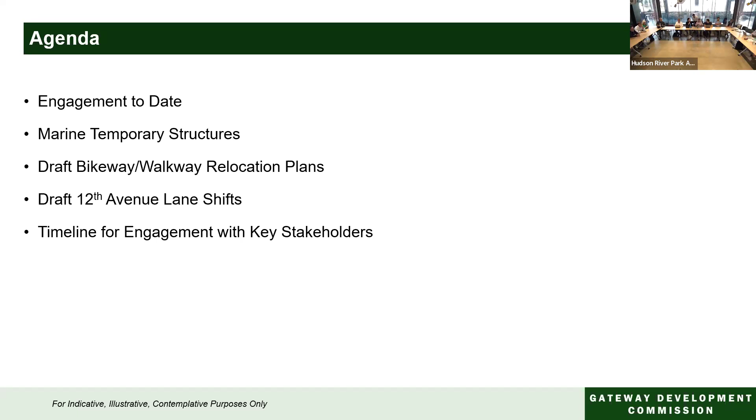So here's our agenda. I'm going to do an overview of engagement to date. We're going to talk about the marine temporary structures that are planned for in the park, the bikeway and walkway relocation plans, the draft 12th Avenue lane shifts, and then the timeline for engagement with key stakeholders.

Engagement to date. So we just want to provide a snapshot of some of the meetings that have taken place since last June of 2024, specific to waterside and landside work in Hudson River Park. In June of 2024, we presented to the Waterfront, Parks, and Environment Committee as part of the 4F process that is federally mandated. And then CB4 submitted a comment letter as part of that process. Then we came back because there were additional changes in April of this year. CB4 submitted their letter in May of '25.

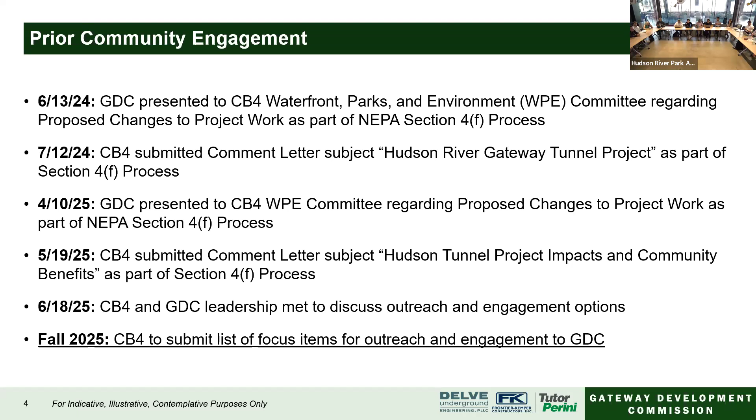And then in June, we met with CB4 leadership to discuss outreach and engagement options, also community benefits. And what we're expecting from CB4 is to submit a list of things they want us to run down and what are some possible community benefits that we can provide as part of this project. Next slide.

This provides a nice snapshot of a lot of the work that we're doing, and we do talk about New Jersey here a little bit, so I hope that's okay with everybody. But just moving west to east, we are about to wrap up what is called the Tonnelle Avenue Bridge Utility project by the end of this year. Then moving down a little bit, you have the Palisades Tunnel contract, which will be boring through the Palisades rock, going from North Bergen to Weehawken. That will eventually connect into the river and then into the Manhattan Tunnel. Move down a little bit further, you have the Hudson County Shaft that's being built in Weehawken.

And I'm sure most of you have seen this in the water, the Hudson River Ground Stabilization Project. You have a cofferdam that is out there right now. That project is to strengthen the soil in the Hudson River. If you've attended past meetings of ours before, we have described it, we call it chocolate pudding. We need to strengthen the soil there because that's the consistency of what's in the river. And then coming through, what we're most focused on here tonight is the Manhattan Tunnel project, which was awarded earlier this year. It's a little bit less than, I think, a $1.7 billion contract. In total, we have 5 contracts that are active right now.

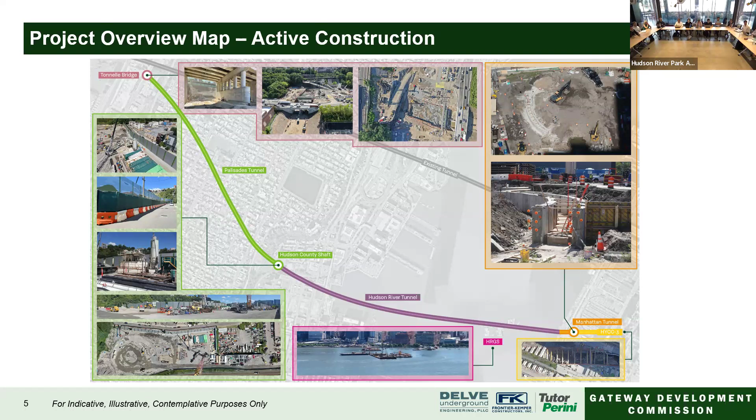I don't want to forget about Hudson Yards concrete casing. Apologies. That is happening. If you're looking at the High Line from West 30th Street going down, you can look right into the concrete casing that they're building right now. And that is expected to be done in November of '26. And then we get to the Manhattan Tunnel project. This is a snapshot of the footprint of our work specific to Manhattan. You can see the Hudson River ground stabilization there, the white box. Moving further, there's our footprint in the park by the heliport across 12th Avenue into block 675. And then we're connecting finally into Penn Station.

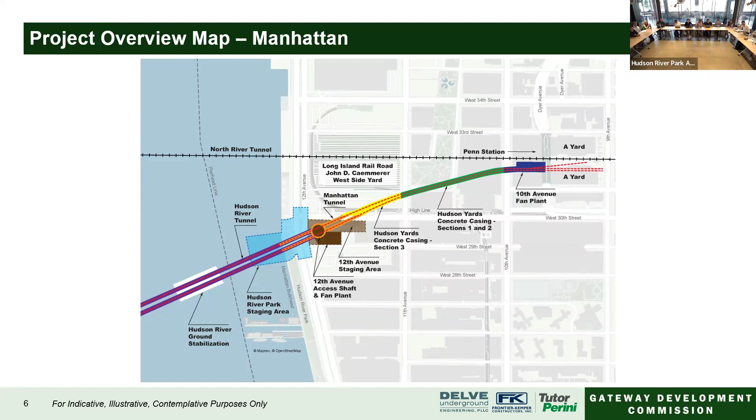We have done an enormous amount of engagement with Hudson River Park Trust. Robert can attest to that. He probably talks to me more than some other people that he works with, and I apologize for that. That's going to continue for a long time, but they are truly one of our most important stakeholders, and I honestly could not thank them enough for all the work that they do with us on a weekly and daily

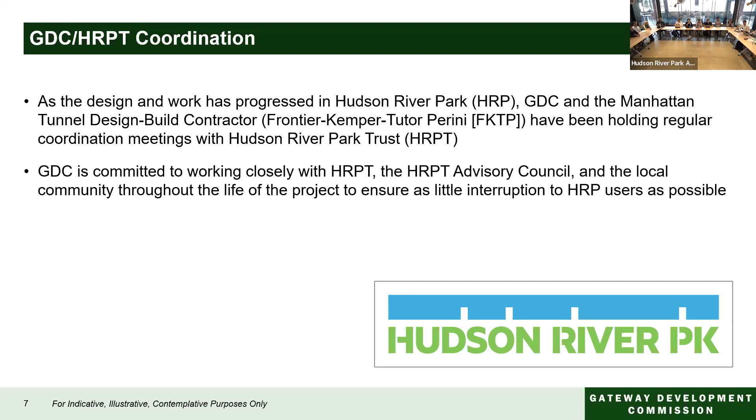basis, and they've been doing it for years, during the draft EIS stage, and their guidance and feedback about the use of their park and the expectations of everyone who uses the park has been invaluable. And we continue to do that. So since April of 2025, we want to talk about some of the key modifications from that time to here. We're talking about ground stabilization in Hudson River Park across 12th Avenue. That's a modification. Stabilization at the bulkhead, a longer duration of work in the park, and a modified construction footprint.

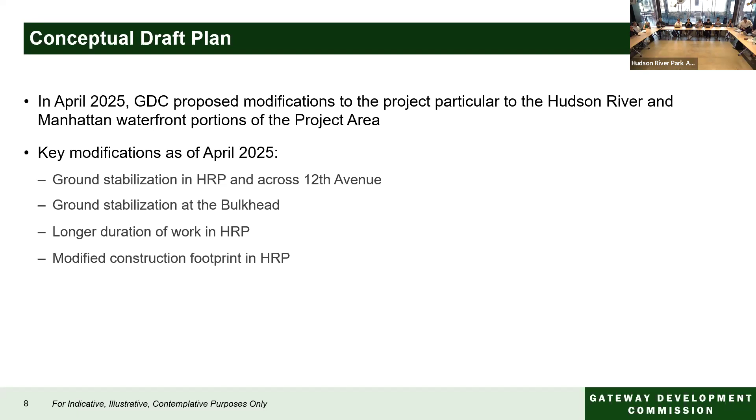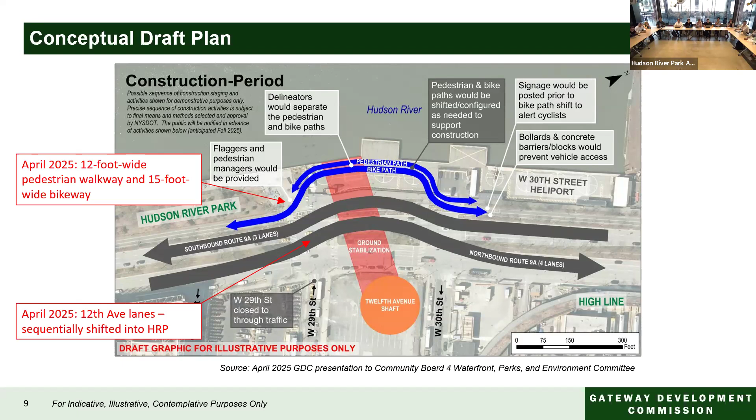This is what we presented in April of 2025, which is showing, I think, the most intense scenario that we could come up with. The pedestrian bike path pushed all the way to the edge of the park, the southbound lane changes happening there on 12th Avenue. So in April of 2025, we presented a 12-foot wide pedestrian walkway and 15-foot wide bikeway, and we had talked about the 12th Avenue lanes sequentially shifting into the park.

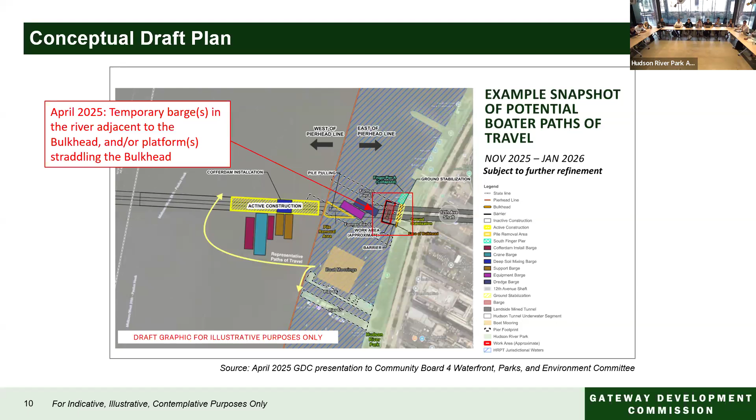And then when we were talking about the barges, we had talked about a platform or something going over it. And today we're going to be giving you much more details about what we are calling a marine temporary structure and what it will look like over the bulkhead. And I'm going to hand it over to Guy Sheba, who is working on our project right now, to describe more about the marine temporary structures.

Thank you, Guy. Rebecca. Hello, everyone. My name is Guy Sheba. I'm with Delve Underground. I'm the design engineering manager for the design from the design build contractor.

So from the design builder team. You need to keep it up in front of you. You need to keep it close so everyone can hear you. Okay, I'll try to do a better job. No, you are doing it great, Rebecca. Yeah. You're doing it great.

The marine temporary structure is a steel structure, steel frame, that's going to be there for the duration of the project in order to enable us to do works over water for grouting, stabilizing the bulkhead, and then in turn freezing, creating a big giant ice cube in order for the tunnels to tunnel safely through. From either side of the marine temporary structure, you can see lightly two barges. We'll see it better in the next slide. But those barges will be there for the purpose of the chiller equipment.

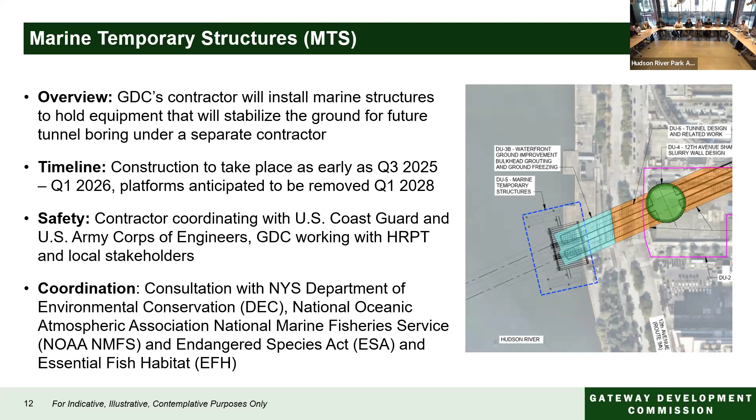Emma, do you want to? I'll keep going, right? The contractor and GDC are coordinating with the U.S. Coast Guard, the Army Corps of Engineers, HRPT, as you heard. How you doing, Robert? As well as DEC and all the entities that you see here in order to get the permits and everything we need to perform the work. Next slide. Awesome, thank you.

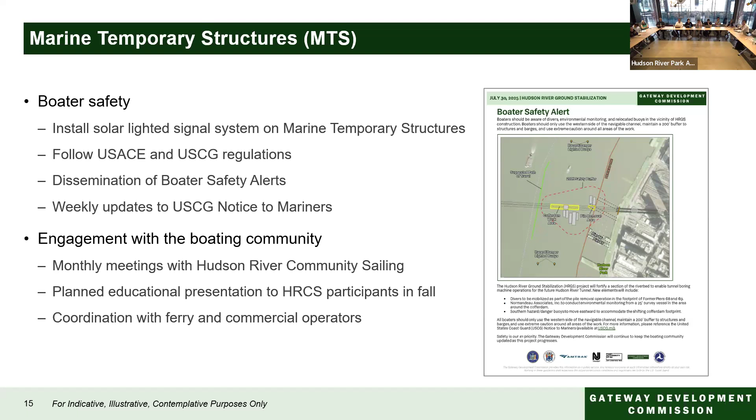And I'm going to hand it over to Andy Mencke, who's on the phone. Do we want to take any questions on that marine temporary structure, or do we want to jump into the bike and walkway path? We're going to keep going and then do questions later. Cool. We'll keep rolling. All right.

Sorry, everybody, I couldn't join you in person tonight, but appreciate you having us. I am Andy Mencke. I'm with Delve Underground. I'm the civil engineer on the project, and I'm intimately involved in some of the work that we're going to go over in the next few slides. So the first bit of slides that we're going to focus on are the bikeway and walkway that parallel and intermix with the park. And then the second deck will be associated with the modifications we're going to do in 12th Avenue.

And then stage 3 is going to be kind of a longer term setup, but we'll get into the details of those as we get into the next few slides. In addition, we've had a lot of internal coordination. As you've heard already, HRPT has been a main partner in a lot of this, as well as the DOTs and Amtrak and GDC as well.

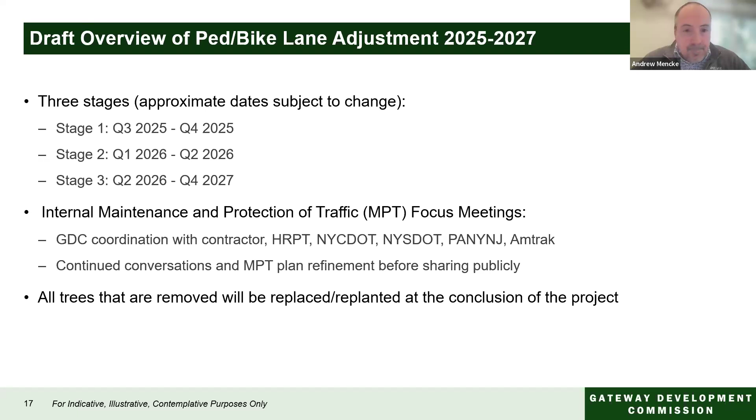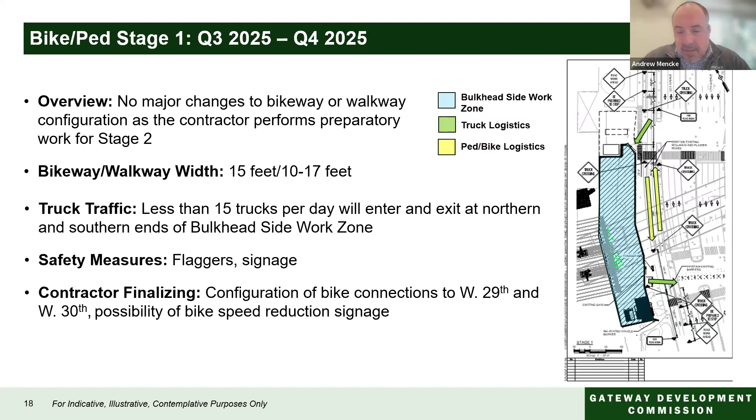I can keep rolling or we can take questions. Keep rolling. All right, I'm rolling.

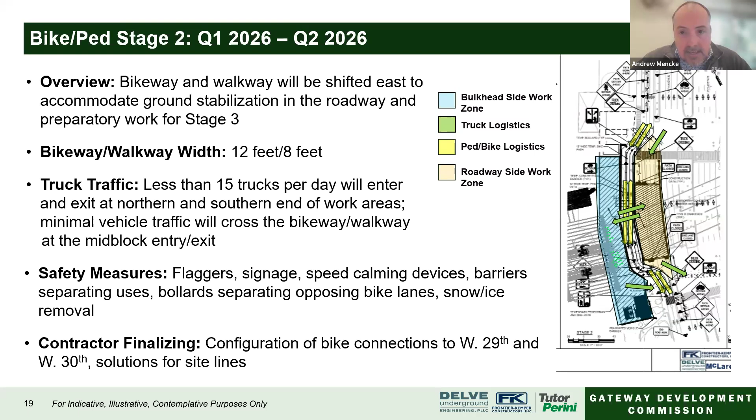Once we're done with this stage, we'll flip back. So when you go to stage 3, you'll see there's a little more detailed cross section of what we'll be looking at for that bike lane / pedestrian path with the Jersey barrier in between the two. And then there's some delineators that are planned, especially in the curved areas, to help keep the bikes within their areas and not passing each other in the curves that are going through that zone.

All right, next slide. All right, so stage 3. So what you can see here is after we've implemented the work in stage 2 in the beige area, we're now able to reestablish the bike path, at least in the horizontal configuration that most people are used to today. And we're going to be able to reestablish the full widths of the bikeway. The pedway does just kind of give you a clean 12-foot width. If you're out there, you know that it kind of deviates a little bit in width as it follows that fence line, but it'll just kind of be a clean 12-foot through this zone.

The main difference is that the work that we're doing in that area to install the freeze pipes come up and they come above grade, and then there's header pipes to connect all the brine solution that is used to freeze the ground, and those need to extend above grade. And so as a result, we need to raise the bike path up 24 inches. If you're familiar with the area, the curb out on 12th right now in that area is 20 inches high. So it's just slightly higher than what the curb is out there right now. But this will facilitate those pipes to be able to extend above grade and to be able to keep that process going underneath as the bikes and peds go over the top.

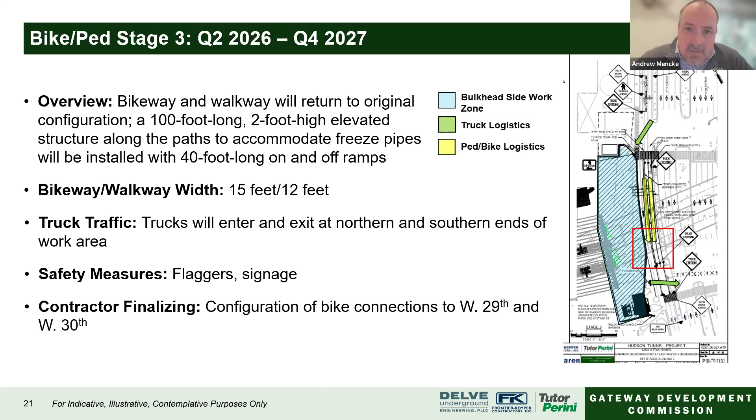We're limited from an ADA standpoint of how quickly we can climb and how high we can climb. So this was kind of the balance of a lot of conversation that we've had with people throughout the last few months. And then in section, if you look at it, which is the next slide, you can kind of see that general representation. There's that curb along 12th. There's the full 24 inches that you would be raised above grade. You'd have barriers on either side. And even though they don't show the Jersey barrier to delineate between the pedestrians and bike path, that will also be implemented.

Down below is a profile. You can kind of see in general, that's all kind of done to scale to give everybody the perspective of what a 6-foot high biker would look like going up 24 inches and then coming back down with the 40-foot ramps on either side and the 100-foot distance that you would travel over the top. So it doesn't look that big on this screen, but we all know that it's going to be an impact to the traveling public. And so we want to get input from folks like we've been doing over the last few months.

As for truck logistics, we go back to kind of the stage 1 configuration where trucks will be coming in from the north and exiting to the south. So that's one of those things where we're going to be able to kind of, outside of stage 2, really keep the public in kind of the same corridor in terms of what they're used to right now, outside of the vertical modification to that.

One other point that I would bring up is that the freeze pipes below the decking will occasionally need to be accessed for an emergency. They may need to do maintenance on them and need to get at them from above. And so the panels that'll be used to build this deck may need to be removed. And so there'd be some durations of impacts to the public. Those impacts would be in the very low volume use of the trails in the middle of the night, things like that. But I'm just bringing that up so people are aware that could happen, but it would be scheduled to occur in those off... I don't like using off-peak because I don't think we have an off-peak with such a busy trail. So low volume is the term that I've been trying to use a little bit more effectively. I think that's it for the bike and ped movements.

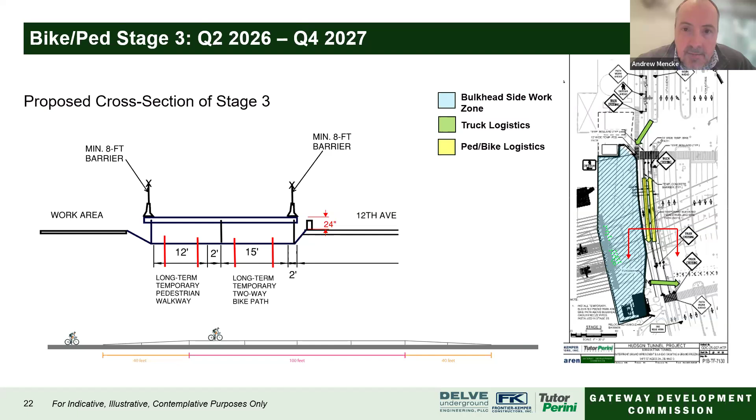I think that addressed that question, Laura, but feel free to let me know if there's... yeah. Okay.

12th Avenue lane shift. So this is completely independent. These two operations, although I want them to align at certain phases at the same time, you'll see as we walk through this, they're completely independent. That was a question that's come up in some of the discussions, if they work together. But in general, to facilitate the jet grout installation that goes in below 12th Avenue, that's the ground improvement to help with the chocolate pudding.

The contractor is going to need to have access from the surface, and for some reason, nobody wants to let me close all 7 lanes of 12th Avenue. So we're going to have to sequence it to facilitate work happening in smaller work zones. And to do that, we're going to have to remove the center median.

And if you've been out there recently, you can see that some of that center median work is ongoing right now. That is going to allow us to establish what I affectionately as a Minnesotan call the ice rink, because it'll give us a clean width of roadway to move the lanes back and forth, and then create these work zones in between those areas. Similarly, as was mentioned earlier, the trees that'll be removed as part of the median work will be replaced and replanted at the conclusion of the project.

I think one of the biggest things, though, is that the eastern sidewalk is going to be impacted between 29th and 30th. It's going to be closed during the duration. In addition, the northern crosswalk across 12th on the north side of 29th will be closed as well. But that impact isn't as dramatic because we're already closing the north side of 29th.

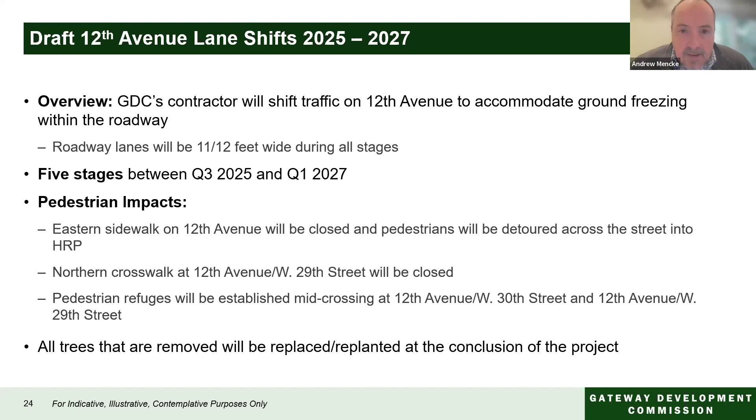If you go to the next slide, this is basically phase one. So once that center median is removed, you can see that we can shift the lanes around and still maintain the 7 lanes of traffic that exist today. That northern crosswalk that I mentioned would be closed, as well as that eastern sidewalk where at stage 1 we'll be implementing the jet grout work. Pedestrians will move across 12th in the areas indicated in purple and enter into the HRP area and move north and south from that direction.

As we move through the various stages, you'll see the work zone move around, and ultimately the traffic lanes basically shift. But one of the things that stays the same is all these pedestrian movements are the same throughout all of the 4 or 5 stages that we're anticipating needing right now. So if you go to stage 2, you'll see that we continue to use those 2 crosswalks for the pedestrians. Now we've shoved the lanes all the way back to the east and freed up a work zone along the west side. And it's pretty much the same setup.

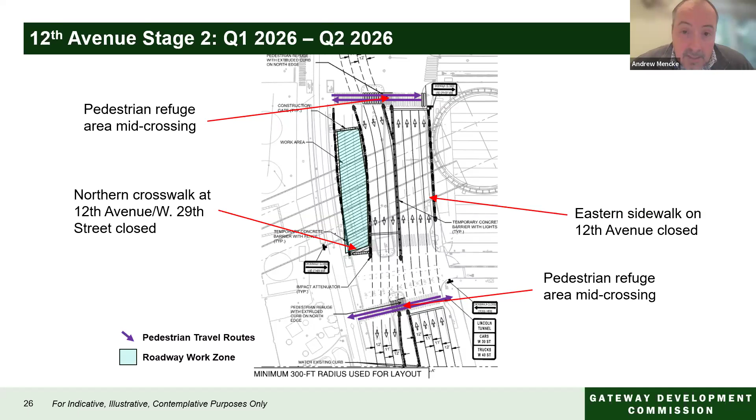And you go to stage 3 and you'll see some of those southbound lanes jump. And you go to stage 4 and the southbound lanes will jump more. And then you go to stage 5 and a couple of the northbound lanes jump. So effectively, we're just kind of working our way across the street with these work zones to install that ground improvement below so that the tunnels can get constructed.

During this period of time, we're just putting in temporary asphalt. The idea there is that as we build the work, it's quicker to put the asphalt in for a temporary condition, because ultimately we want to let the ground improvement get installed and the tunnels get constructed.

And once those are constructed, we would then come back and implement a similar staging operation to install the concrete panels, because this is all concrete pavement that's within 12th Avenue right now. And that operation would follow a similar staging operation in the future. So I think that's it.

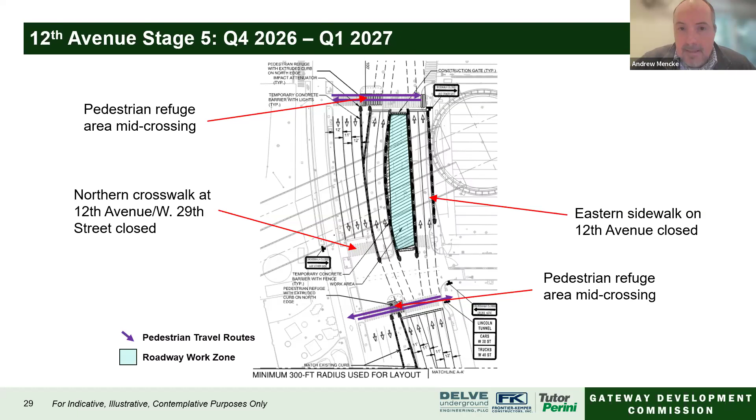I'll jump in here. My name is Laura Colacarcio. I'm the Deputy Director for Government and Community Affairs at the Gateway Development Commission. And recognizing that what's on these slides actually has real world impacts, we want to make sure we talk to you a little bit about how we plan to engage with your group, with the community board, and with members of the public and the people who use the park for commutation, recreation, and what have you. So just spending a little bit of time talking about what we have ahead for us this fall.

Going back to the slides Andy presented, a lot of these meaningful changes where you'll see an appreciable difference on a daily basis happen in the beginning of the year. But we want to make sure we're coming to you now, getting some feedback, answering your questions, and making sure that we can signal to the biking community in particular the changes that are ahead. So we're here tonight. Thank you very much again for having us at the Hudson River Park Advisory Council meeting.

We've also talked to the co-chairs and plan to engage the full committee of Community Board 4's Waterfront Parks and Environment Committee. And then we also have a Manhattan Construction Task Force that GDC hosts that has many of the members that we might see around the table today or on the community board or in our elected officials' offices. But we bring them together on a regular monthly basis to make sure we're reporting out on construction activities. And the next meeting will feature a presentation just the same as what you saw today.

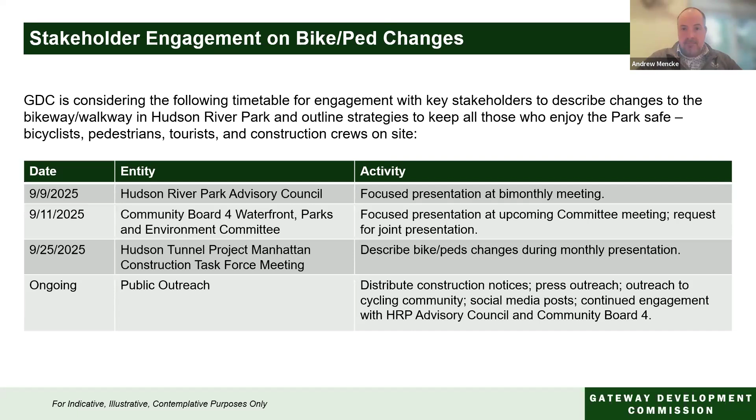We're also doing ongoing public outreach, distributing our construction notices. We outreach to the press when we have meaningful changes so that we can reach a wider audience. We also hope you'll help amplify that messaging for us as well. And then we have continued engagement on social media as well.

In particular, talking about the cycling community, because we do realize that we have an active and engaged group here in New York, and particularly who use Hudson River Park. We want to make sure we're going to some of those groups who can get to the folks who are utilizing the park on a daily basis. And so we've identified some groups here where we'll be doing direct engagement, giving them the same information we've given you today, and also checking in to see how things are going once those changes are in place.

If you could take a look at this list, if you know of any others that we might have missed or have any other ideas of folks we should be reaching out to, please let us know. We'd be happy to take it and happy to continue to talk to more folks so that they're safely using the park going forward. We're also posting construction notices on our website. I think Emma's added you to a mailing list where you're getting all of that information. Those construction notices will be sent to all of the elected officials' offices, the community boards, the surrounding buildings. We're making sure that we're doing a really good job of letting folks in the area know what's happening in their neighborhood.

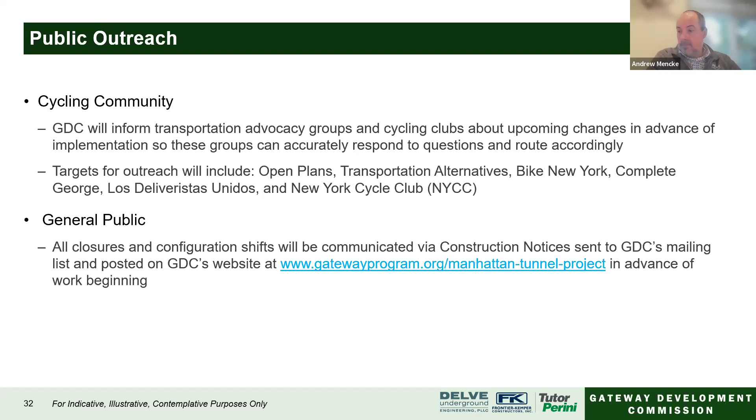And then finally, we're eager to hear from all of you. I'm excited to take your questions, and I'm sure you have many. That was an in-depth presentation. But we want to see, as these changes are taking place in the park, what you're hearing from your neighbors, from other members of the council, from users of the park who come to you as liaisons to organizations like ours. So you can utilize a hotline we have here. I'm sure we'll all make ourselves very available. We also have an email address that's monitored 24/7 and responded to in real time. Our website is also a really great place to keep track of the progress.

You can sign up for notices for the Manhattan Tunnel project specifically, for the Hudson Yards concrete casing that Rebecca talked about, and for the Hudson River ground stabilization, which is that in-water work that you see out there today. Each one of those projects also has an EarthCam. So what you can do is visit our website on the homepage and get a live look at construction progress. So that's really exciting for people like me who get to see from an office what it looks like, but then go out into the real world and see exactly what construction looks like today.

We have a general mailing list that's also really fun and engaging. We have a newsletter that talks a little bit more about the Hudson Tunnel project. We're here talking about the nuts and bolts of construction as it impacts everyday lives, but the overall project is really something to behold. We haven't dug tunnels like these in over 100 years. It's an engineering marvel. There are several ways that we tunnel to do this. It's really neat to just get the history, get some profiles of the workers who are actually doing the work on the ground for this project. And that newsletter is going to cover all of that information for you. So I'd encourage you to sign up.

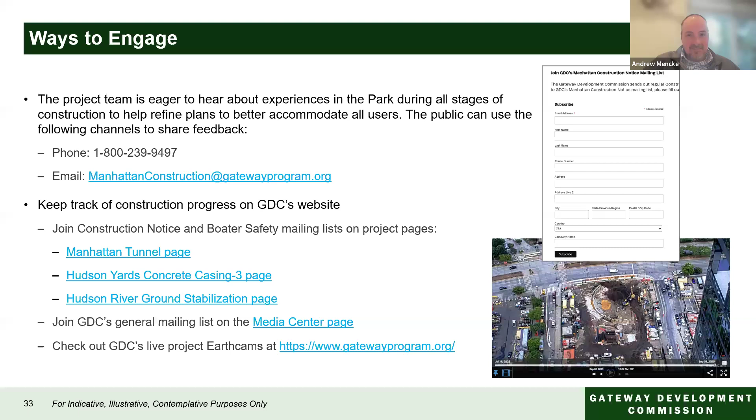Well, exciting. I mean, he sounds excited, but we will have a community engagement center. We'd love to invite you all in November once we're launched and open. We'll have some engagement with local schools in the area to get them excited about the project. We hope that it'll be a real space that people come and visit to learn about all of the progress on both sides of the river. And I'm sorry that that's not on the slide here, but we'll make sure that Robert gets the date for when we officially launch. And with that, I think we'll open for questions.

Okay. Thank you. I want to thank the folks from GDC. This was a really impressive presentation, a lot of information to process. We really do look forward to continued engagement with you, and maybe you coming back at some point when there's new information or evolution in the process or progression. So we look forward to that as well. And so now I will start to take questions. I will first start in the room and then I will go online. And did I see a hand?

A really quick question. As the bike lane goes up 24 inches over 40 feet, is there a drop off on either side? There'll be a barrier on either side to keep people contained within that up and down, the approaches. Yeah, we'll mitigate the drop off. And so the barrier will stop, you know, because there's a lot of traffic and there's a lot of passing. So there's no chance of somebody falling off 2 feet on right or left. Yeah, there's a barrier. Thank you. That's correct. Yep. But good comment. Okay, I'm going to pass the mics around.

I'll use the mic. Thank you very much. That was a very impressive presentation. My concern is what systems are in place if slurry disposal fails, which is basically the offshoot from the tunneling machines, which I'm sure you're aware of. And can you confirm no untreated discharge will go into the river? I assume you will have pits or backup barges to dispose of that? Because the last thing we need is an accident to happen and for it to be released in the sewers, which I know is a really major no-no.

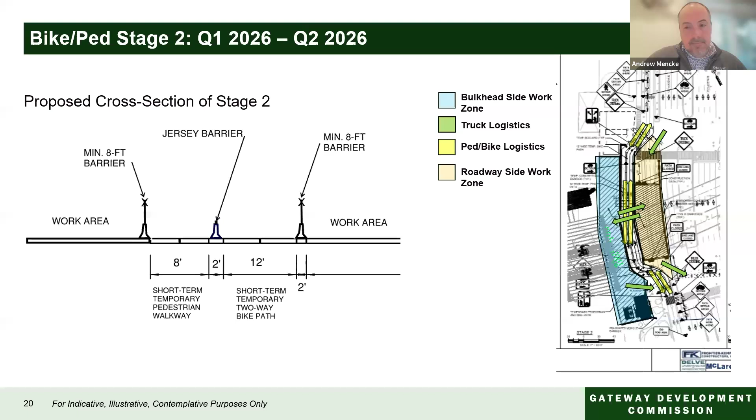And just so I understand, within that enclosed area near the bulkhead, you'll be doing that work, and will that include drilling equipment, or is there a noise level that's associated with the work that'll be happening in that space? I'll turn it over to our engineering team. Guy, if you want to talk about that. Can you repeat the question? Sorry. With regards to noise level, is the noise contained by the containment that Ben was talking about?

Yeah, I'm just curious about the noise within that, which will have an impact on the fish potentially, or there's a certain amount of research that it'll have an impact on the fish, that they'll avoid that. And I'm just curious if that was a condition of your permit at all, or if it did not come up. I can't remember if that was a condition of a permit, but we can definitely take it offline and check. Yeah, thank you.

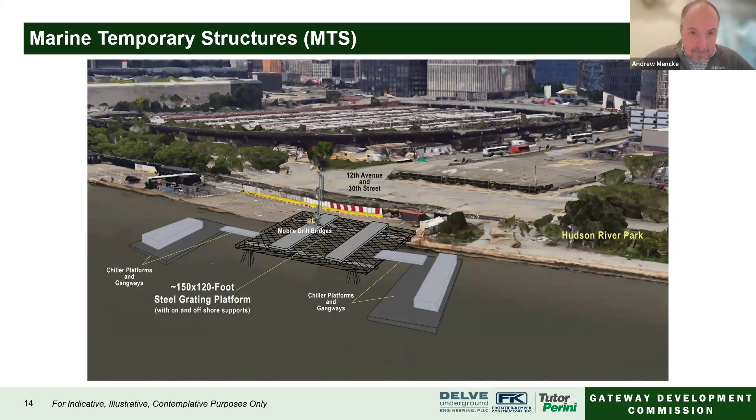Okay, we do have to keep moving at this point. I thank everyone for their questions. This was a terrific presentation and we hope to see you again. So, excellent, excellent. Thank you, everyone.

And that's one of our goals. Thank you. Okay, next item is the historic ship berthing opportunities. And Mary. Well, I wanted to start with an overview because we've asked a couple of times, now that Pier 97 is open, if there was anything being done to bring a vessel in there, because it's one of the 3 piers where that's supposed to happen.

And just as a reminder to everyone, there is 1 berth at Pier 97, 1 berth at Pier 26, 2 berths at Pier 25 for long-term docking, and 1 berth for visiting vessels there, as well as the one used for the restaurant operation we know as Grand Banks. So is there any ongoing discussion with any of the applicants from the last RFEI, which was back in 2019, or plans to issue a new one?

We haven't engaged the most recent ones, and I actually just want to amend your list here because I don't think it was accurate. Pier 25 has 3 to 4 berths in total. Pier 26 has 1 berth. Pier 66A has a berth. Pier 84 has 1 berth. Pier 86 obviously has the largest historic ship museum in New York City, the most heavily visited one, which has several ships as part of it. And then Pier 97 also has a berth. Okay. I did not count the Intrepid, true.